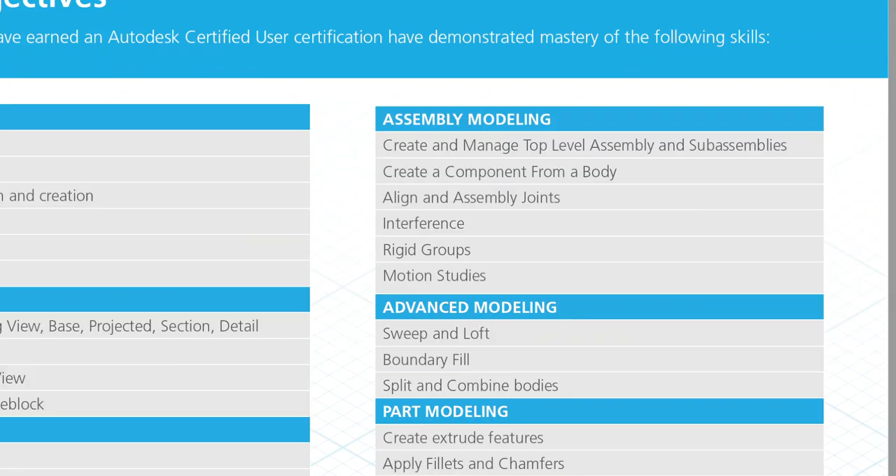We're going to look at another spotlighted exam objective, and the one we're going to look at is under the assembly modeling category, called interference. Interference is going to allow us to see what kind of components maybe have issues with one another as they collide or maybe are running into one another.

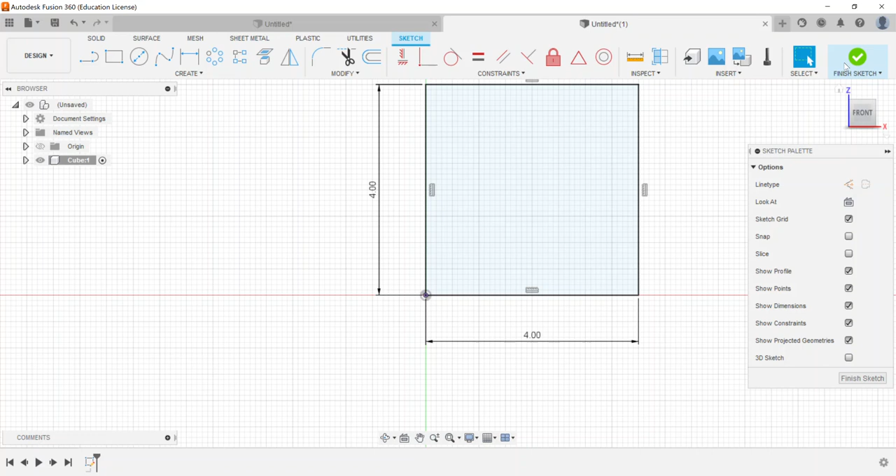So I'm going to go ahead and go into Fusion. I'm going to open up a new design here. And just for the creation of it, I'm going to start with a new component. I'm going to call this cube. And I'm just going to go ahead and create a cube maybe about 4 inches by 4 inches. And I'm going to extrude this to be 4 inches as well. So here's our cube shape.

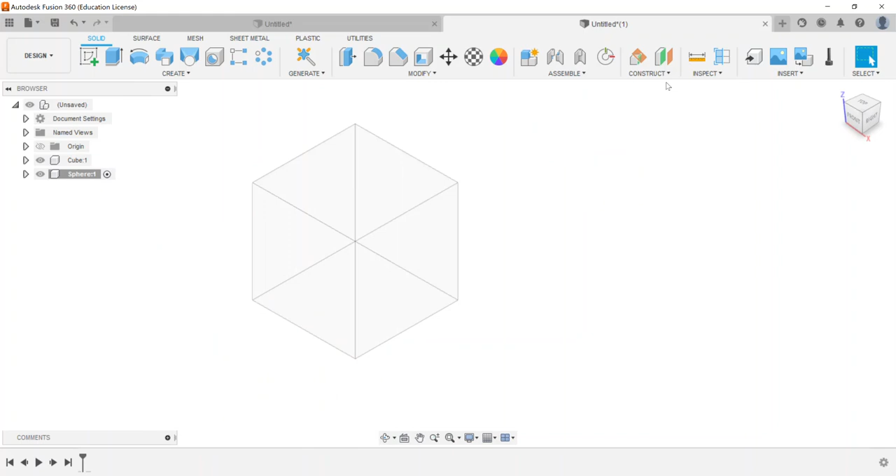I'm going to go back up to the top level assembly. I'm going to create another component. We'll call this sphere. And with this, I'm going to create a shape. And actually, let's go ahead and do a little offset plane. So I'm going to offset this by 2 inches since we did a 4-inch depth. And I'm going to create it on the work plane.

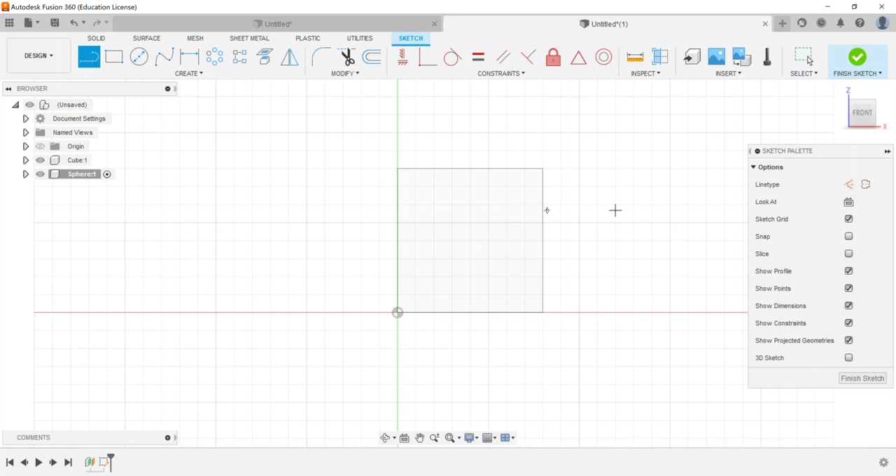If the cube gets in the way, let me hide the visibility. There we go. Now I can choose the work plane, turn the cube back on, and I'm going to draw a line right on the edge of the cube. And let's do a circle here. I'll set the center right there on the midpoint of the line. Click on the outside edge, and let me trim away the inside of the circle there. And I'm going to finish the sketch.

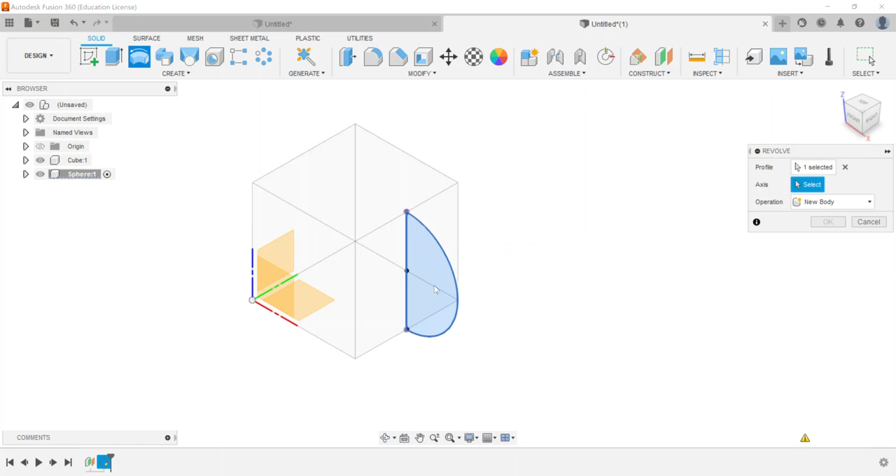Let me revolve the shape about the line axis there, and I'll say OK. And then I'm going to activate the top level assembly. So here are our two components that we've modeled together. So they are two separate components. What we can check for, especially as you look for assemblies, is I'm going to go to the inspect panel, and I'm going to go down to interference.

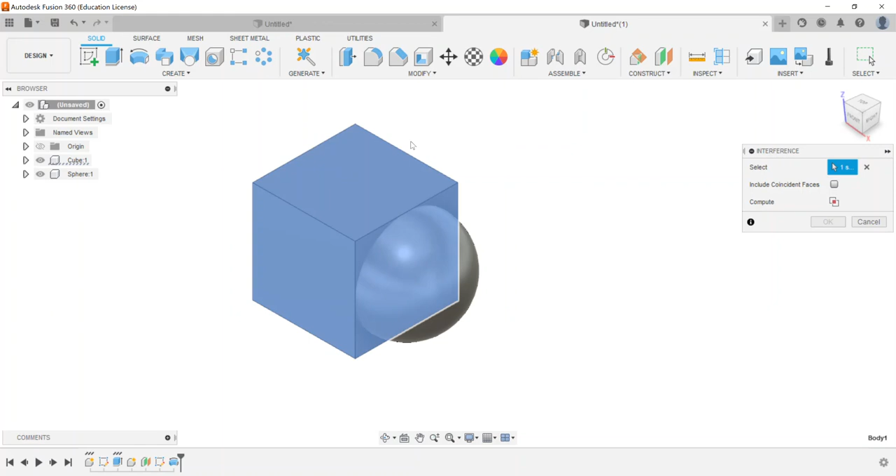So I'm going to select the cube, and I'll select the sphere, and then I'm going to click compute, and it's going to be able to see that yes, I do have one interference. A lot of times within the Fusion 360 Autodesk Certified User Exam, they want you to identify how many groups of interferences.

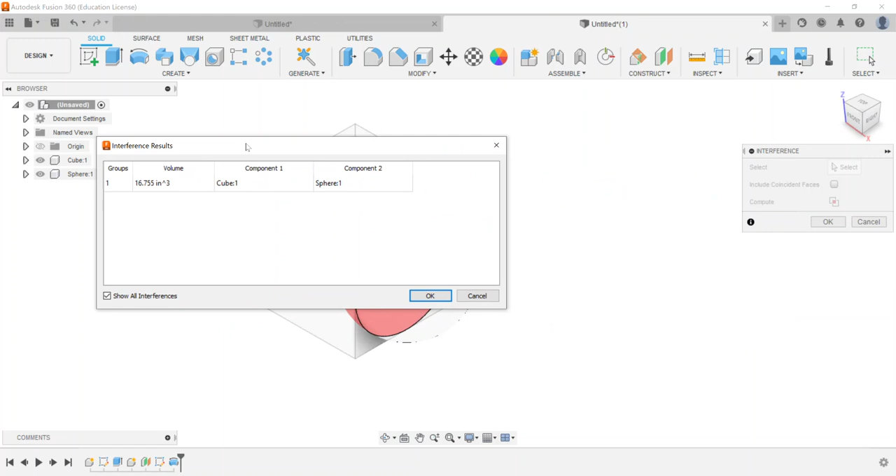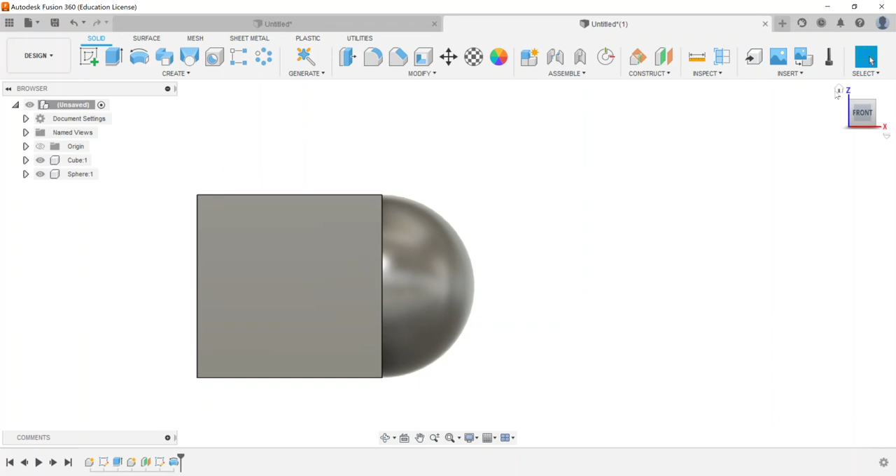So right now we've got one interference, and if I move this out of the way, we can see the area in red is the area that is going to be having the interference. So that gives you the volume, how much interference there is between the two components, and what components are causing the issue. So that is really the basics of running the interference analysis tool under the inspect panel.

So you could do this with a lot of components by clicking on them and being able to check on their movements, but this is one way to go through and see that. Again, for the exam, they really ask, can the students go through and read what those interferences are, how much of a volume there is, and maybe how many groups. So if I had multiple components in there, I would be able to see there's maybe more than one group going on as well. So that's a little bit on the interference analysis within Fusion 360.